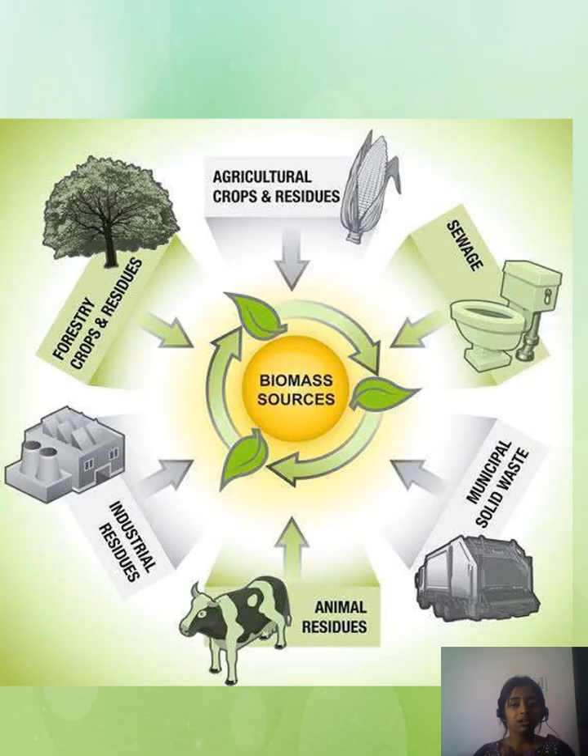Let us know what is renewable energy resources. Energy sources that are easily replaced after being consumed are called renewable energy resources. And what is non-renewable energy resources? Energy sources that are not replaced or replenished after being used, and may take several years to replace, are called non-renewable energy resources.

We have to know the two types of energy. Energy can be classified into two types: conventional sources and non-conventional sources. In conventional sources, we have commercial and non-commercial. In non-conventional sources, we have solar energy, wind energy, tidal energy, geothermal energy, and biomass based energy. In commercial, we have coal, oil and natural gas, and thermal power. In non-commercial, we have firewood, hydropower, and nuclear power.

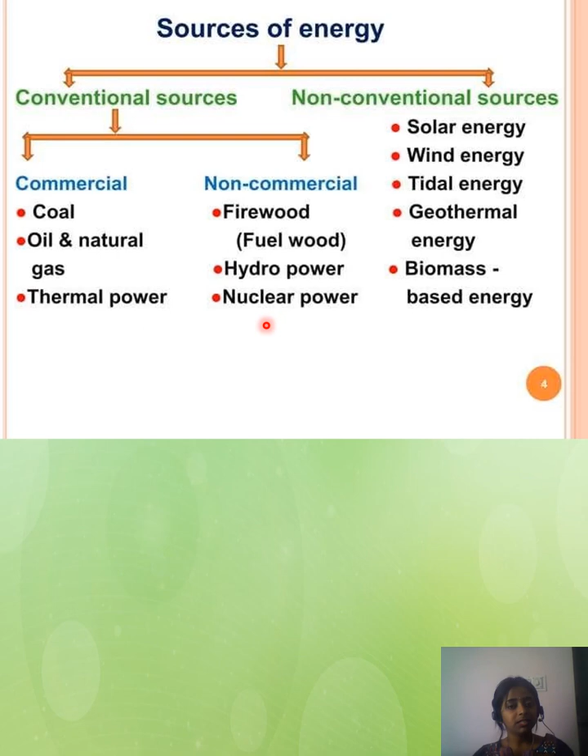So what does this mean? This is nothing but, some energy which we are using needs so much time to be formed. So when we use it continuously, there are more chances that they get exhausted.

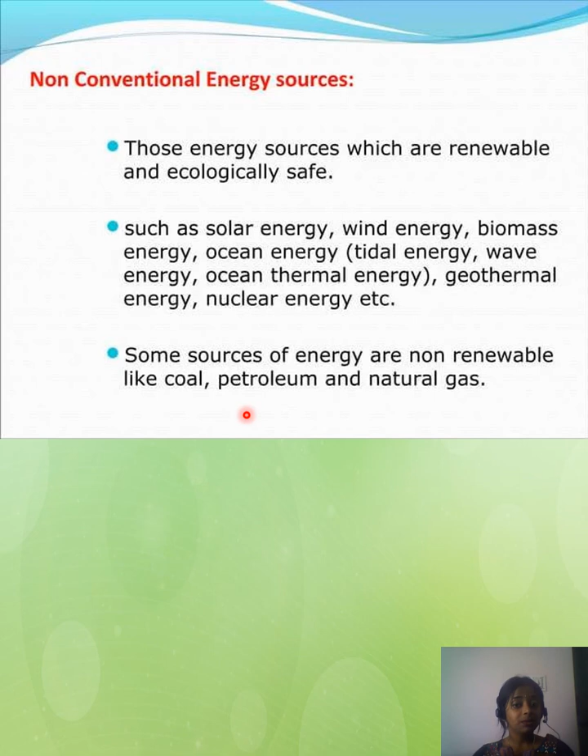Here is our topic, non-conventional energy sources. Those are energy sources which are renewable and ecologically safe, such as solar energy, wind energy, biomass energy, ocean energy, tidal energy, wave energy, ocean thermal energy, geothermal energy, nuclear energy, etc. Some sources of energy are non-renewable, like coal, petroleum, and natural gas.

About 16% of global final energy consumption comes from renewable, with 10% coming from traditional biomass, mainly used for heating, and 3.4% from hydroelectricity. New renewable such as small hydro, modern biomass, wind, solar, geothermal and biofuel accounted for another 3% and are growing very rapidly. The share of renewable in electricity generation is around 19%, with 16% of global electricity coming from hydroelectricity and 3% from new renewable.

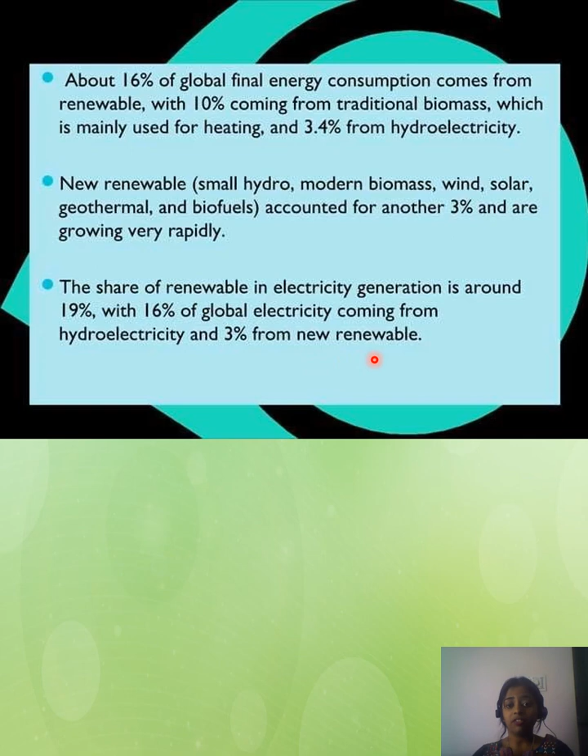The first type of renewable energy which we are going to see is wind energy.

What is wind energy? Everyone must be knowing it, but let me explain. Air flows can be used to run wind turbines. Wind energy is used in windmills, which convert the kinetic energy of the wind into mechanical or electrical energy. This kinetic energy can be used to do mechanical work like lifting water from wells or grinding grains in flour mills. A single windmill produces only a small amount of electricity. Large numbers of windmills in a large area are coupled together to produce more electricity in wind energy farms.

The minimum wind speed required is 15 km per hour. At present, wind power potential of India is 1020 megawatt. The largest wind farm is near Kanyakumari in Tamil Nadu, which generates 380 megawatt electricity.

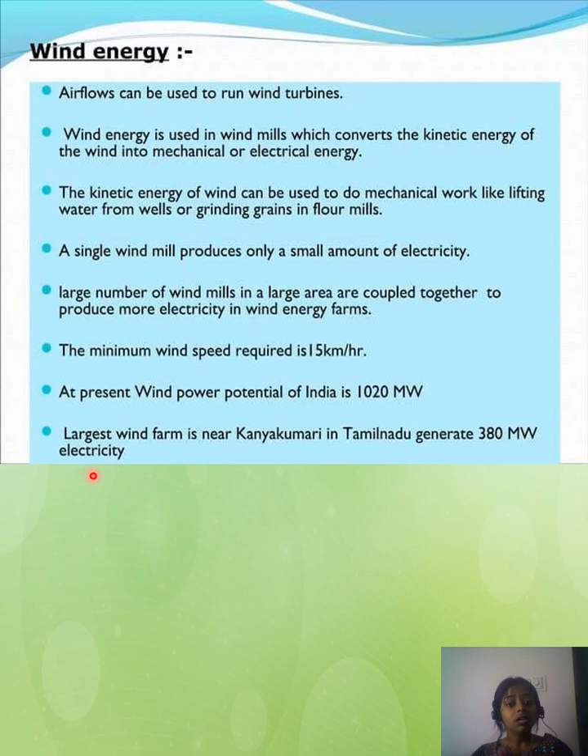These are some pics of the wind farms. I guess you guys must have seen this.

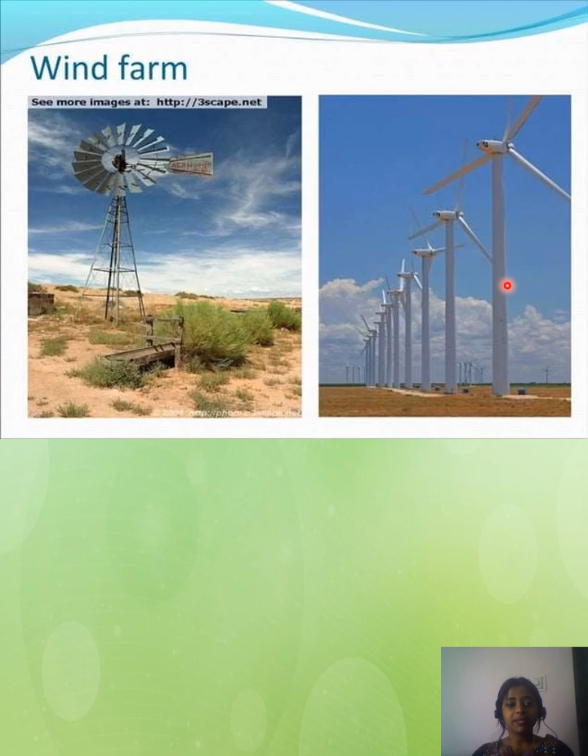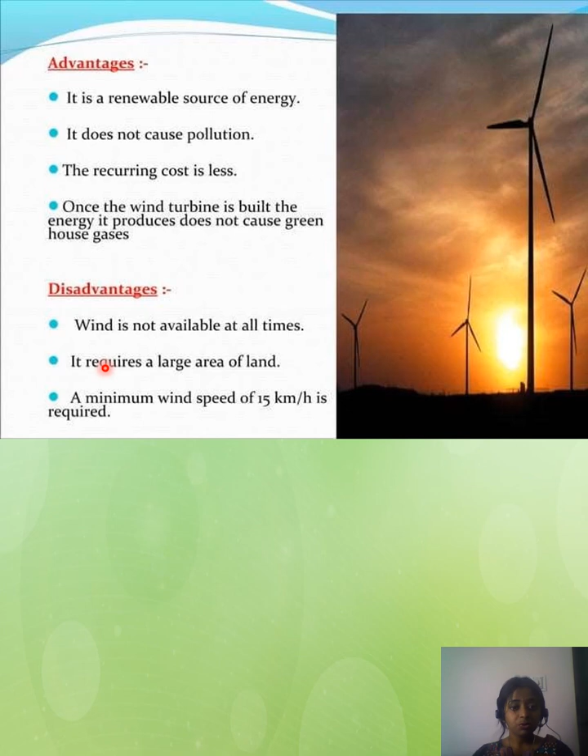Let us know some advantages and disadvantages of using this. What are the advantages? It is a renewable source of energy and does not cause pollution. What are the disadvantages? Wind is not available at all times — yes, it is very true — and it requires a large area of land.

Now let us come to what is solar energy. Everyone knows it very well how we get solar energy — yes, what you're thinking is really right. Solar energy is energy obtained from the sun in the form of heat and light, derived in the form of solar radiation. The solar energy received by the near Earth space is approximately 1.4 kilojoules per second, known as the solar constant.

The heat energy is used in solar heating devices like solar cooker, solar water heater, solar furnaces, etc. The light energy is used in solar cells. These are some applications of solar energy, isn't it?

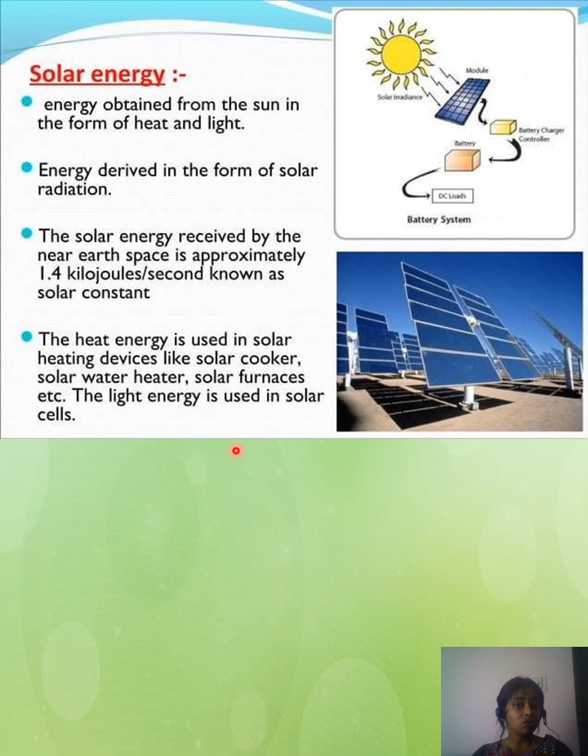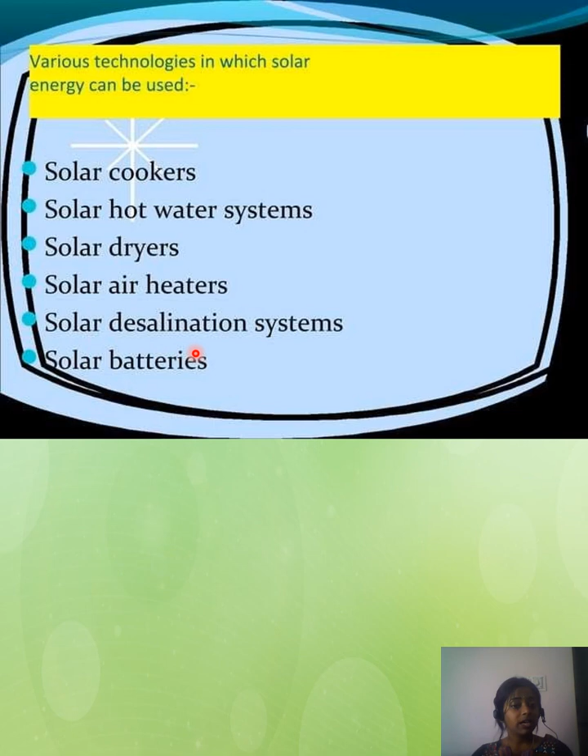Various technologies in which solar energy can be used. These are some technologies which can be built using solar energy: solar cookers, solar hot water systems, solar dryers, solar air heaters, solar desalination systems, and solar batteries.

Now let us come to the first application, solar cooker. The box type of solar cooker has an insulated box painted black inside. It is covered by a glass plate which allows heat to enter inside but does not allow heat to escape. It has a mirror to reflect more sunlight into the box. The food to be cooked is kept in containers inside the box. It can produce a temperature of 100 to 140 degrees.

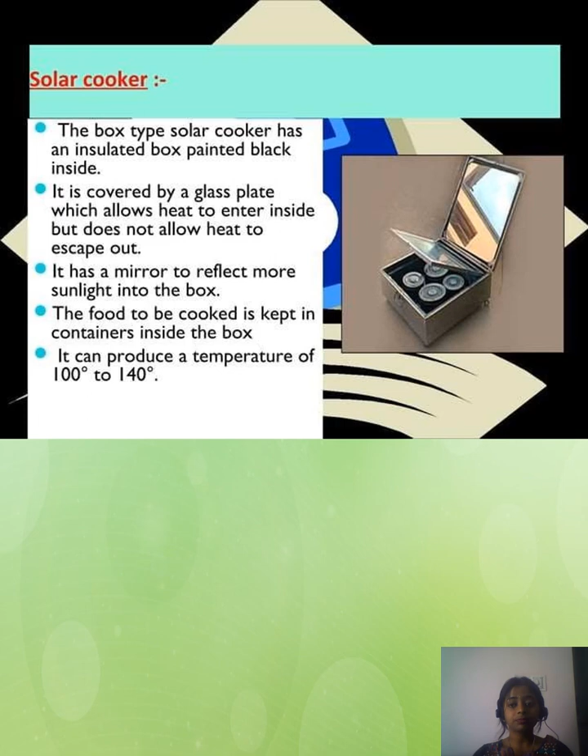Solar water heaters. A solar water heater has an insulated box painted black inside with a system of copper tubes. It is covered with a glass plate which allows heat to enter inside but does not allow the heat to escape out. When water flows through the copper tube, it absorbs the heat and becomes hot.

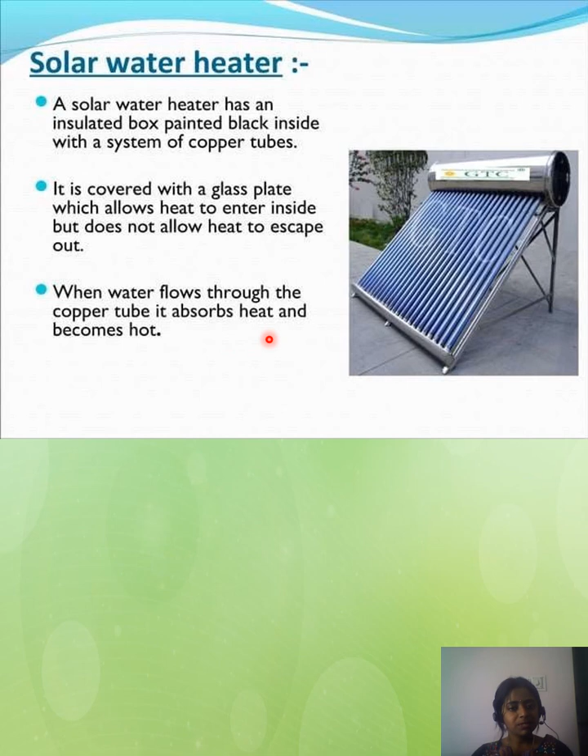Solar cell: a device which converts solar energy into electrical energy. Solar energy is what we receive from the sun, but it cannot be directly used to do any kind of work. So that energy is converted into electrical energy by means of a solar cell.

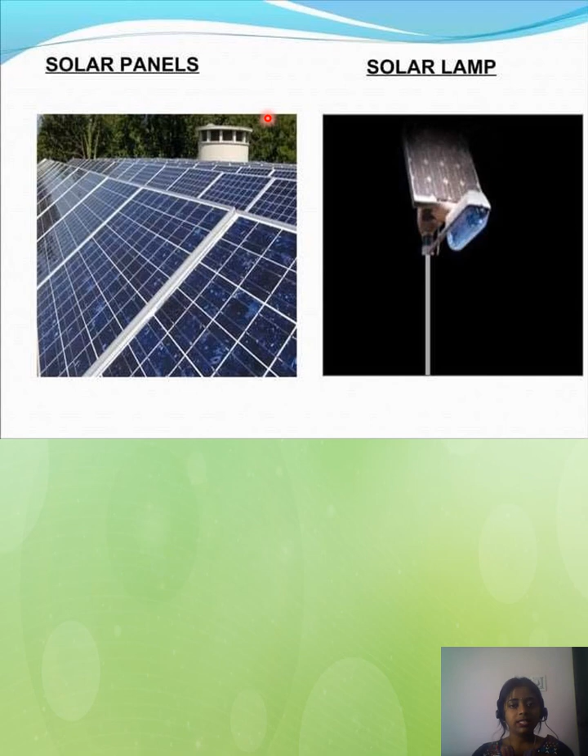Solar cells are made from semiconductors like silicon, germanium, gallium, etc. A single solar cell produces a voltage of about 0.5 to 1 volt and produces about 0.7 watt of electricity. Several solar cells are arranged in a solar panel to produce more electricity. These are some pictures of solar panels and solar lamps.

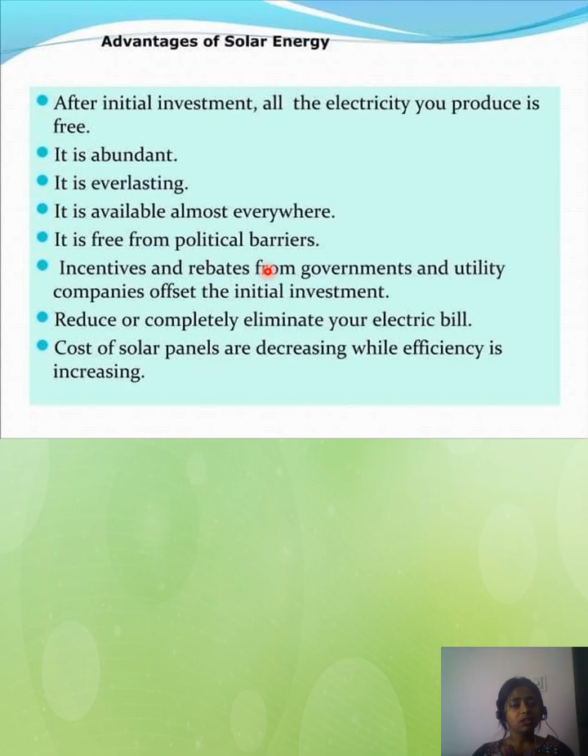Advantages of solar energy: after initial investment, all the electricity you produce is free. It is abundant and everlasting. It is available almost everywhere, and it is free from political barriers. These are some advantages of solar energy.

Next, coming to hydropower energy. What is a hydropower plant? In hydropower plants, water from rivers is stored by constructing dams. You must have seen dams, right? The KRS dam, which is very famous, is an example of this hydropower plant.

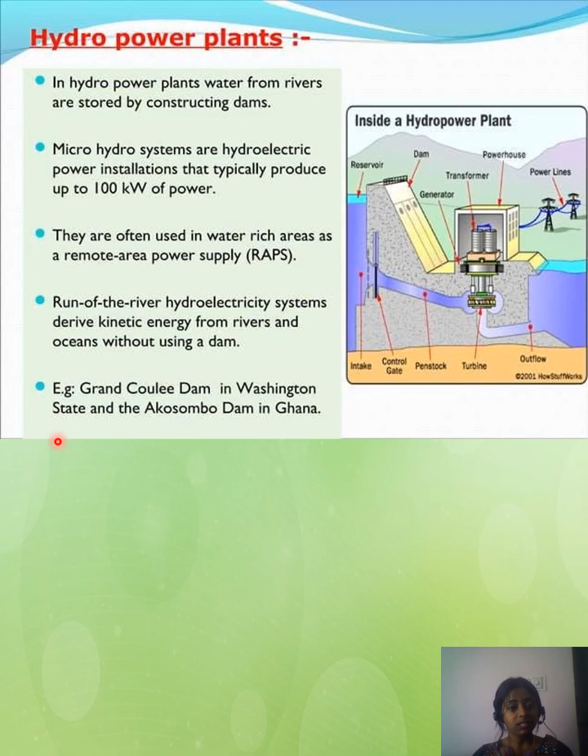Micro hydro systems are hydroelectric power installations that typically produce up to 100 kilowatts of power. They are often used in water-rich areas such as remote area power supply, also called RAPS. Run-of-the-river hydroelectricity systems derive kinetic energy from rivers and oceans without using a dam. Examples are the Grand Coulee Dam in Washington state and the Akosombo Dam in Ghana.

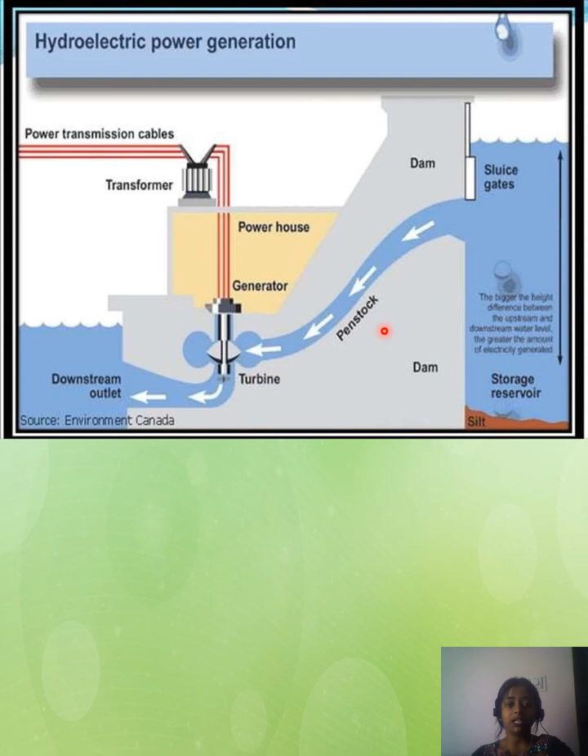This is a picture of hydroelectric power generation. You could see there's a turbine and penstock, and water, and this picture shows how hydroelectric power generation takes place.

Advantages of hydropower: flowing water is a renewable source of energy, and the electricity produced does not cause pollution. Disadvantages: the initial cost is high, a large area of land gets submerged, and the decomposition of vegetation produces methane gas, which is a greenhouse gas.

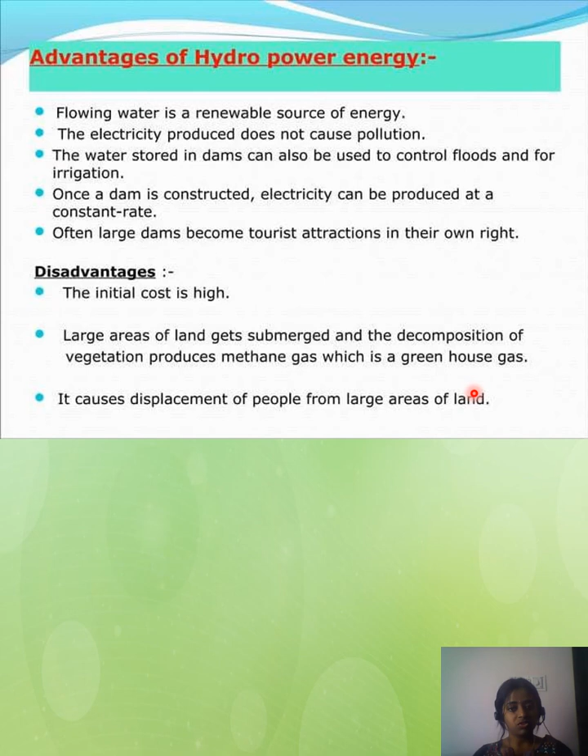Next, coming to biogas. Biogas is the gas or energy produced from living organisms — a mixture of gases containing methane, carbon dioxide, hydrogen and hydrogen sulfide. It is produced by anaerobic degradation of animal waste. Animal waste is waste produced by animals, which is a living organism. Anaerobic degradation means breakdown of organic matter by bacteria in the absence of oxygen.

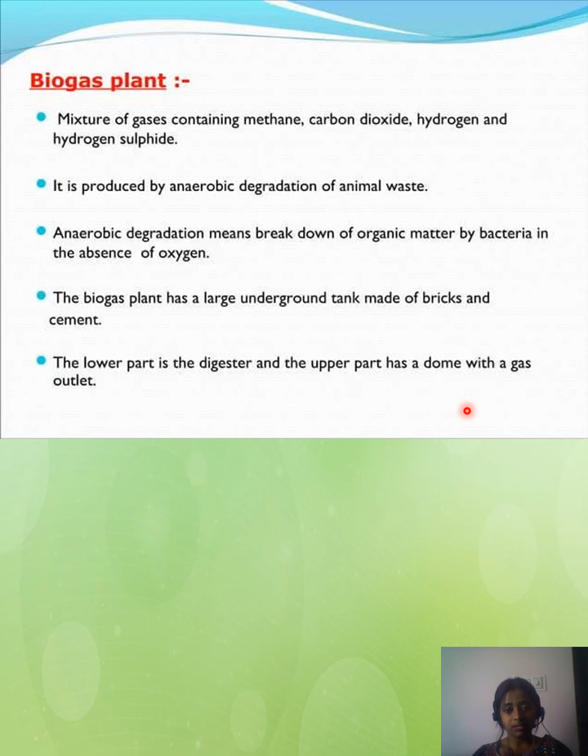The biogas plant has a large underground tank made of bricks and cement. The lower part is the digester and the upper part has a dome with a gas outlet. Animal dung is mixed with water in the mixing tank and the slurry is sent into the digester. The gas is taken out through the gas outlet and used for heating and lighting purposes. The slurry left behind is rich in nitrogen and phosphorus and is used as manure for crops.

From cattle dung alone, biogas of a magnitude of 22,500 megawatts can be produced annually. A 60 cubic feet gobar gas plant can serve the needs of one average family. This gas contains 55 to 70% methane, which is inflammable, and it is generally used as cooking gas and for generation of electricity. This is the fixed dome type biogas plant.

This is a biogas plant. Let's see how it is actually constructed — this is a biogas plant, you can observe the picture of it.

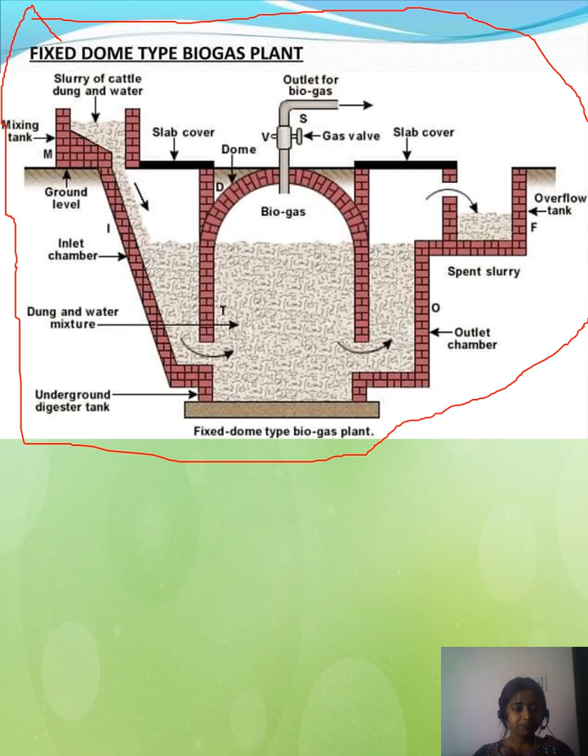Advantages of biogas: clean, non-polluting and cheap, direct supply of gas from tank, and no maintenance cost.

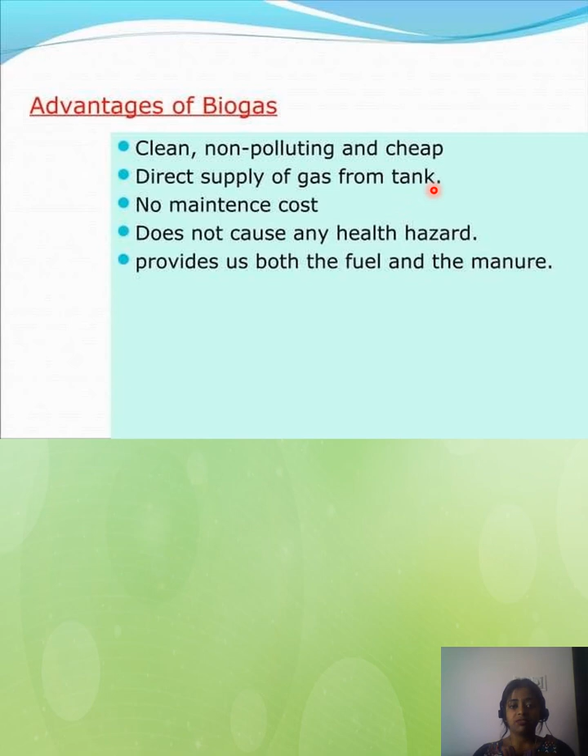Tidal energy is produced by the gravitational force of the sun and moon, making use of water movement from a high tide to a low tide. You must have observed these tides when you visit the beach. High tide to low tide refers to the rise and fall of water in the ocean. A difference of several meters is required between the high and low tide.

Ocean waves and tides can be made to turn a turbine and generate electricity. This point is very important.

This one is very important. Areas where rivers flow into the sea experience waves and tides, and electricity can be generated there. It has much potential.

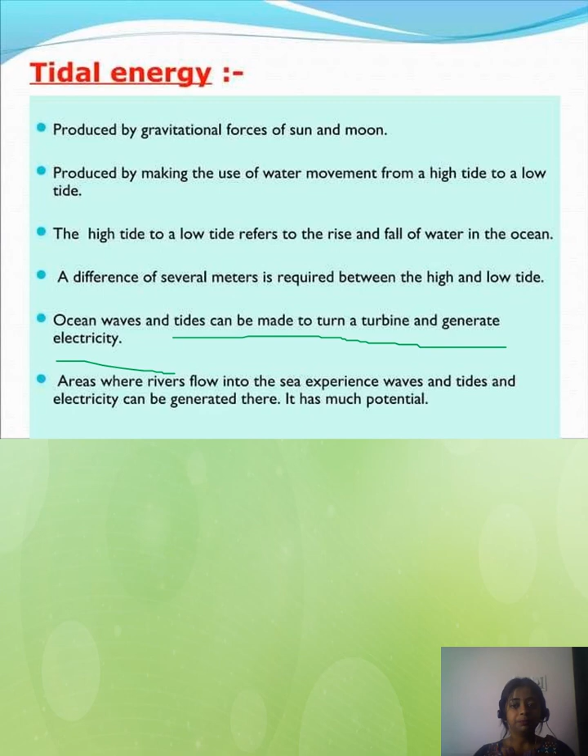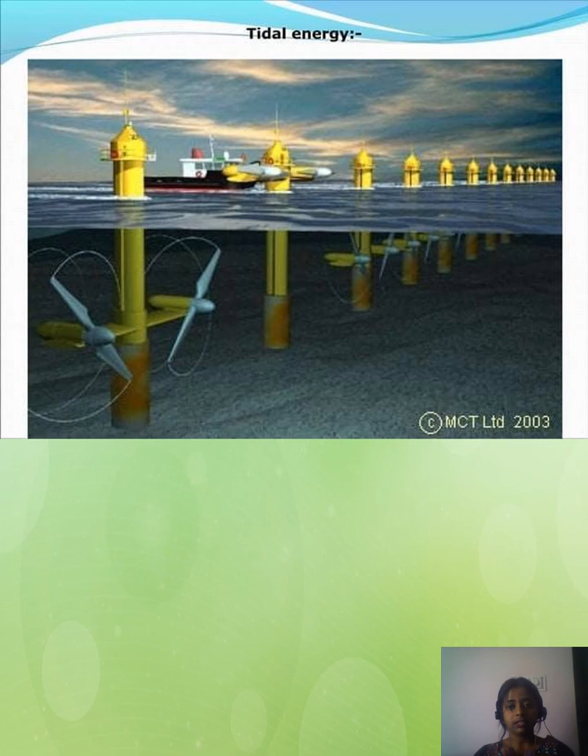This is the picture of tidal energy. You could see this is the ocean and you have turbines here. So that's how the energy is generated. As you know, we have a large coastal line and major river systems in our country. Electricity can be generated on a large scale from waves and tides.

The periodic rise and fall of sea level due to gravitational attraction of the moon causes tides. A tidal barrage is constructed at a narrow opening between the land and sea. The movement of water during high tide and low tide can be used to rotate the turbines to produce electricity. The tidal power in India is found in Gulf of Cambay, Gulf of Kutch, and the Sundarbans Delta.

Geothermal energy. This is a bit familiar. It means the energy harnessed from the hot rocks present inside the earth. High temperature, high pressure steam fields exist below the earth's surface in many places. At the core, temperature may reach over 9000 degrees Fahrenheit.

This heat comes from the fission of radioactive material naturally present in the rocks. The deeper regions of the Earth's crust are very hot. This heat melts rocks and forms magma. The magma collects below at some places called hot spots. This word is important, hot spots. I'll be underlining it.

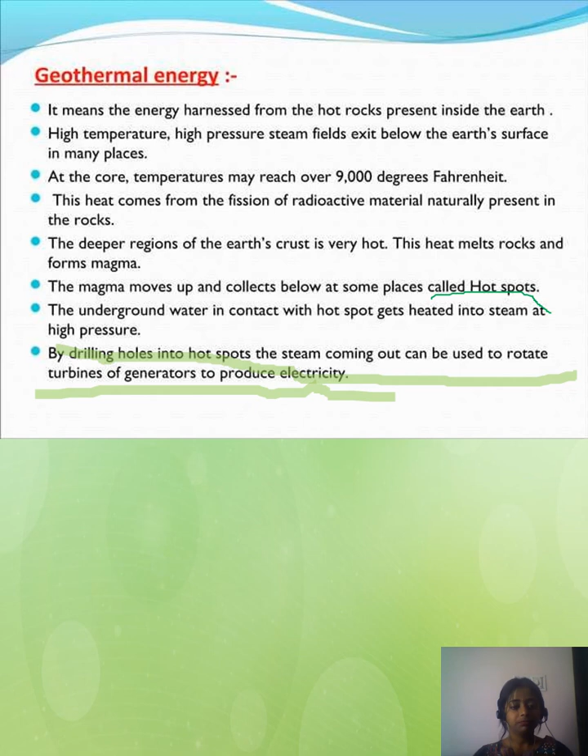There are 46 hydrothermal areas in India where the water temperature normally exceeds 150 degrees centigrade. Electricity can be generated from these hot springs.

In many places, the hot water comes out of the ground through cracks. Natural examples include Manikaran, Kullu, and Sohana, Haryana.

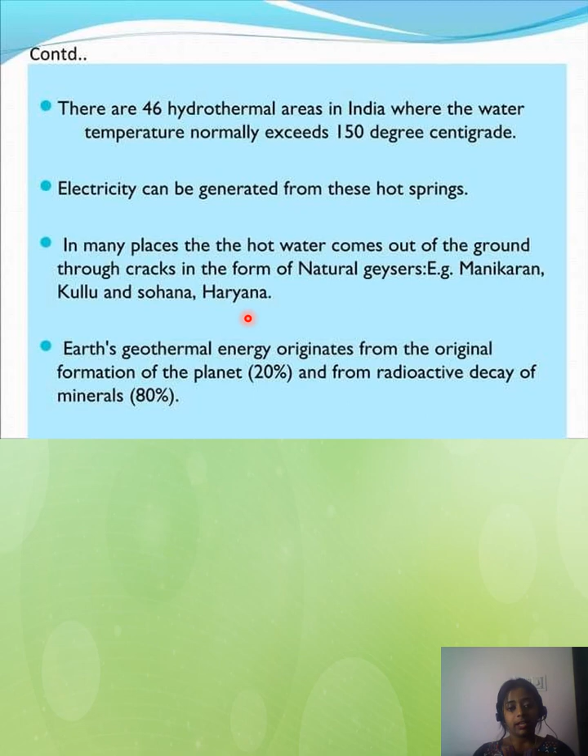This is the schematic of the binary cycle of a geothermal power plant.

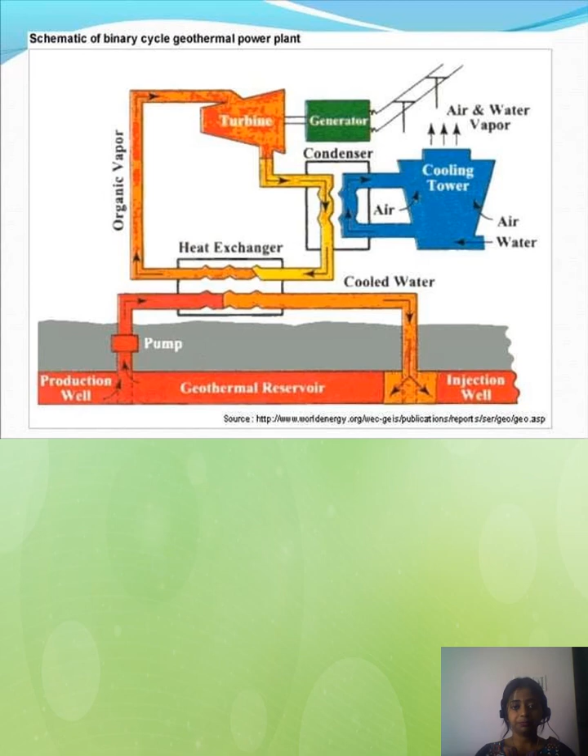Advantages of geothermal energy: significant cost saving. Geothermal energy generally involves low running costs since it saves 80% cost over fossil fuels and no fuel is used to generate the power. Other benefits include reduced reliance on fossil fuels, environmental benefits, direct use, job creation, and economic benefits.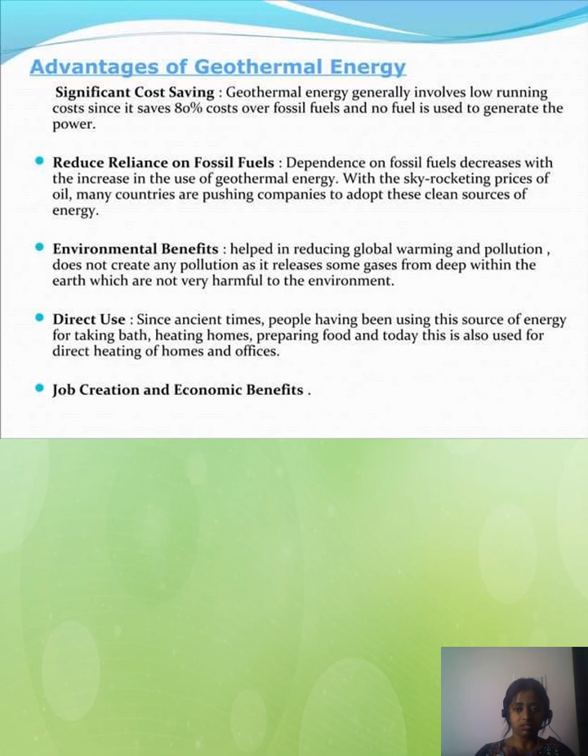Biofuel: biofuels include a wide range of fuels derived from biomass. The term covers solid biomass, liquid fuels, and various biogases. Liquid biofuels include bioalcohols such as bioethanol, and oils such as biodiesel. Gaseous biofuels include biogas, landfill gas, and synthetic gas.

Bioethanol is an alcohol made by fermenting the sugar components of plant materials, and it is made mostly from sugar and starch crops. Trees and grasses are also used as feedstock for ethanol production. Ethanol can be used as fuel for vehicles in its pure form.

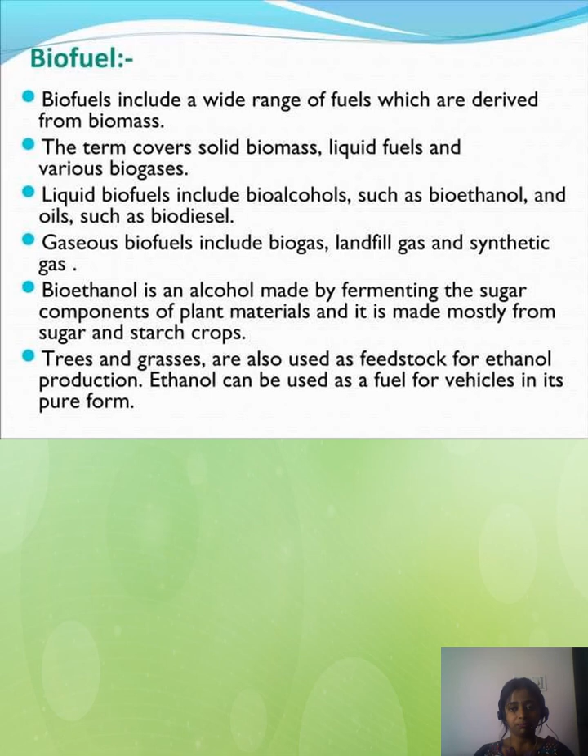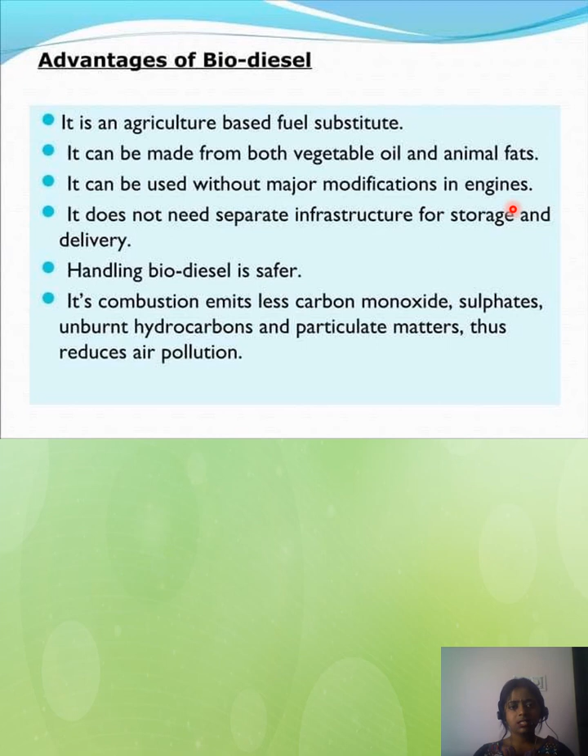Advantages of biodiesel: it is an agriculture-based fuel substitute. It can be made from both vegetable oil and animal fats. It can be used without major modification in engines. These are some advantages of biodiesel.

Nuclear energy. Nuclear energy is the energy released during nuclear reactions. Some mass is converted into energy, and a very large amount of energy is produced during nuclear reactions. Nuclear reactions are of two types. Nuclear fission: the nucleus of a heavy atom like uranium, plutonium, etc. splits into smaller nuclei with release of a large amount of energy.

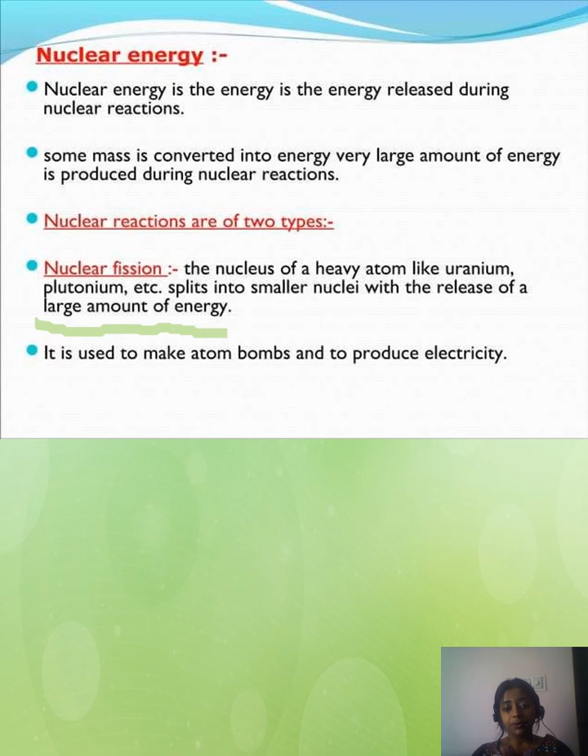It is used to make atom bombs and to produce electricity. In a nuclear power plant, the heat energy produced by a controlled nuclear fission chain reaction is used to produce steam which rotates the turbine of the generator to produce electricity.

Nuclear fusion: a nuclear reaction in which small nuclei fuse together to form a heavier nucleus with the release of a very large amount of energy. The energy of the sun is produced by the fusion of hydrogen nuclei to form a helium nucleus. It is used to make hydrogen bombs.

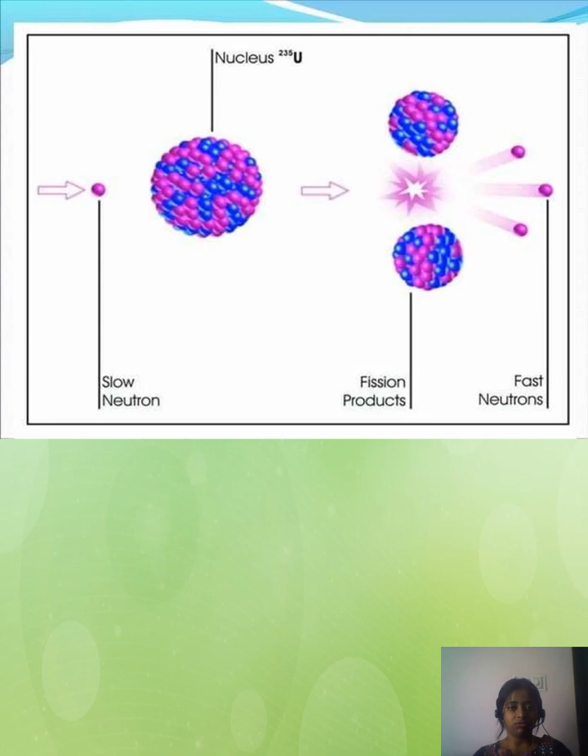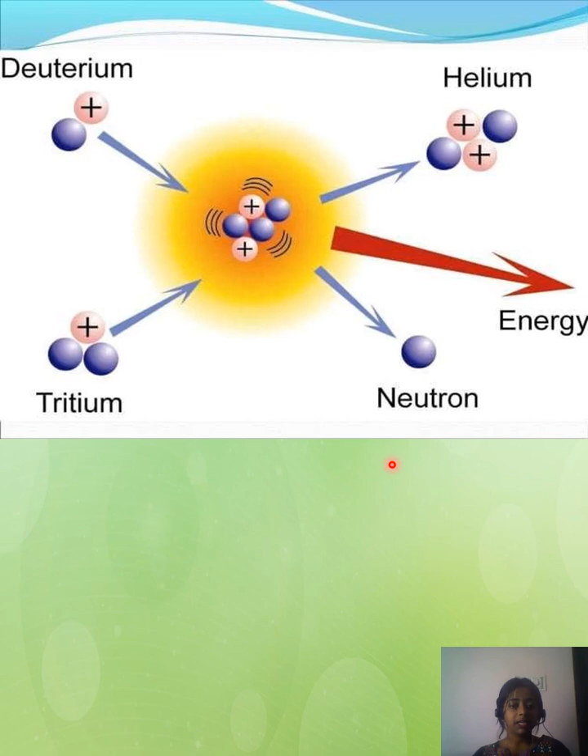You could see how fission and fusion take place. This is the image of it. You could see there is deuterium and tritium. So we will be getting helium and neutron, which produces energy.

Advantages of nuclear energy: it produces a very large amount of energy per unit mass than any other source of energy. If safety measures are taken, it is more environment friendly than fossil fuels.

Disadvantages: the cost of nuclear reactors is very high, the availability of nuclear fuel is limited, and nuclear reactors produce harmful nuclear waste which is difficult to dispose of. Yes, very true, those radiations are also very harsh.

Conservation and use of natural resources: minimize exploitation of non-renewable energy resources, emphasize use of renewable energy, stop wastage of energy, create awareness among people regarding wise and judicious use of energy, and make more use of biomass-based energy.